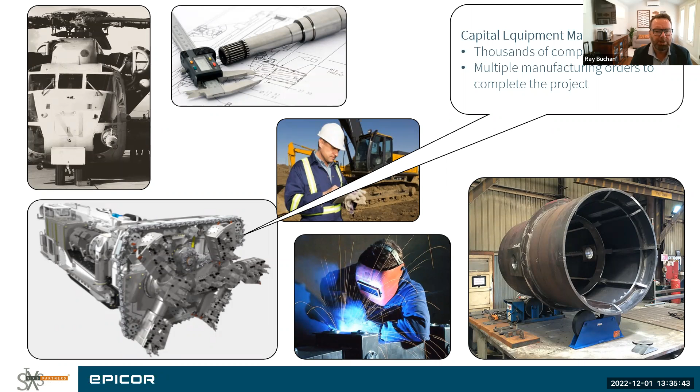So who uses Epicor in a project-based custom make-to-order environment? Hopefully you fall into one of these types of categories, but people that build capital equipment, so there might be thousands of components to track. There'll be multiple manufacturing jobs or orders to complete that project.

People in aerospace and defense are high users of the project module. They need the overall visibility into a project. They need project costing, tracking R&D or SR&ED claims, integration to Microsoft Project. They would have multiple quotes, sales orders, POs that are all associated to this overall project.

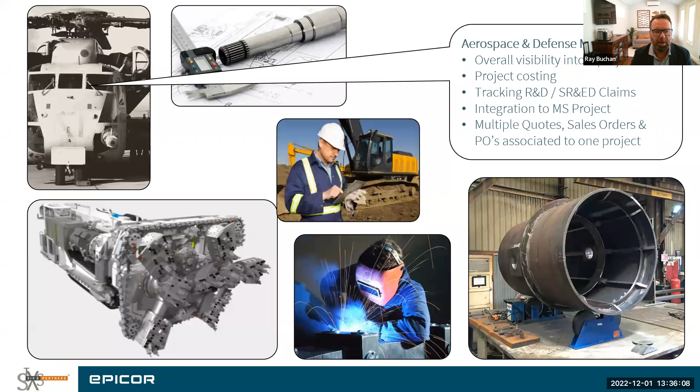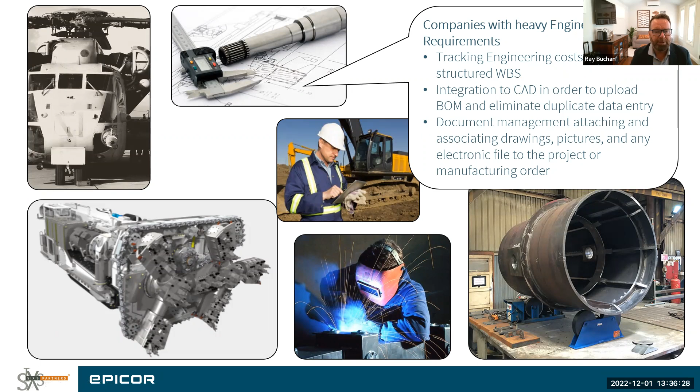Companies with heavy engineering requirements, tracking engineering costs against a structured work breakdown structure, integration to CAD in order to upload bills of materials and eliminate duplicate data entry, document management, attaching and associating drawings, pictures, or really any electronic file to the project to help manage that.

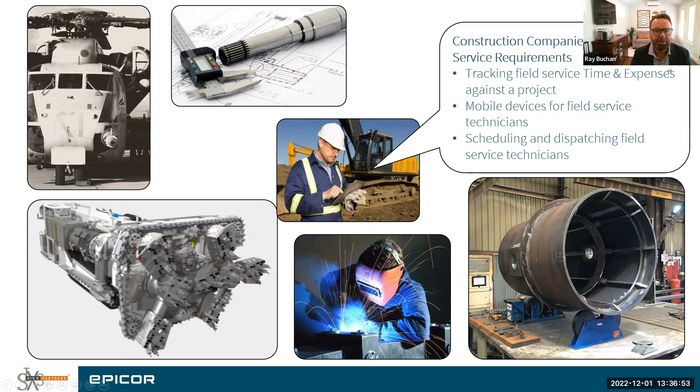People that have service requirements, such as construction companies or people that will build capital equipment and maybe go on site and install it or commission it. They need to track their field service technicians' time and expenses against the project. They want them to have mobile devices to enter those while they're out in the field. And then, of course, somebody to schedule and dispatch those technicians.

And then finally, companies that are made to order or configured to order, where they would be looking at detailed takeoffs for estimating. They build something once, they'll never build it again - it's a pure custom or make-to-order job. And also configure-to-order customers, so where it's a similar product configured for the customer with some options and features.

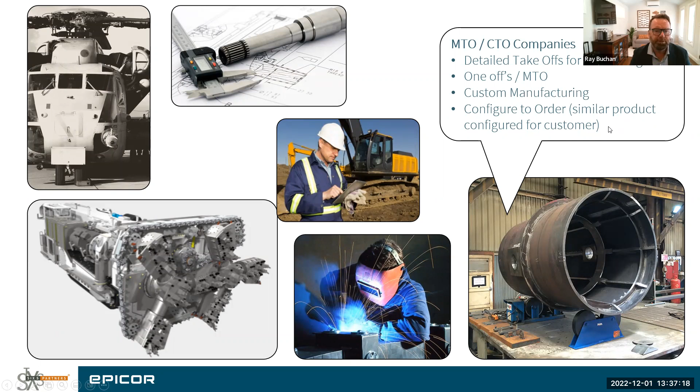So moving along here, briefly about Epicor as a company. Been in business for 50 years, over 27,000 customers worldwide in 150 countries, about 4,400 employees, and Epicor is a $1 billion company. For the smaller companies that are online here today, don't let that scare you. We've got companies that are startups pre-revenue, to companies that are 2 and 3 users, all the way up to companies that are themselves $1 billion companies that may be 600 or 700 users.

And Success Partners - so we are the local implementation partner. We have about 60 staff across Canada and the US. We've been in business for about 16 years, and we are dedicated to Epicor. So we sell, we implement, and we support Epicor Kinetic ERP.

Really, our strength is our people. So our team are people that have worked in industry. They've used the software, they've decided to take a job in consulting. They're certified on the product to the same standards as Epicor direct employees, and they're the ones that are going to help you with best practices and recommendations. So the implementation and training, it's really less about the point and click and learning the software and more about how is this going to work for your business, and we'll help you with that.

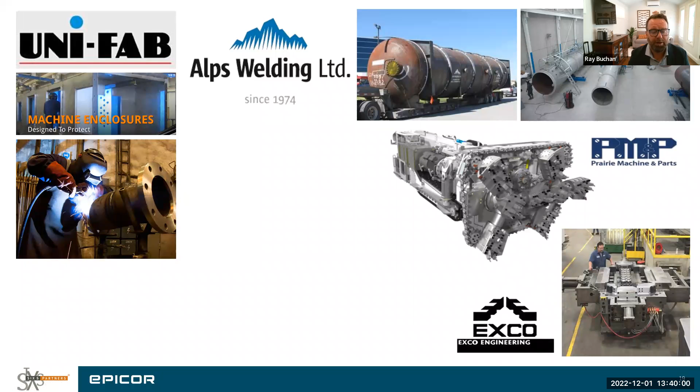Exco Engineering is a heavy tool and die company, also project-based and a big user of the CAD integration software. Prairie Machine, based out in Saskatoon, Saskatchewan, manufactures capital equipment, including mines for mining equipment for the potash mines. Lots of aerospace and defense customers too, like Cascade out in BC. Again, lots of metal fabricators.

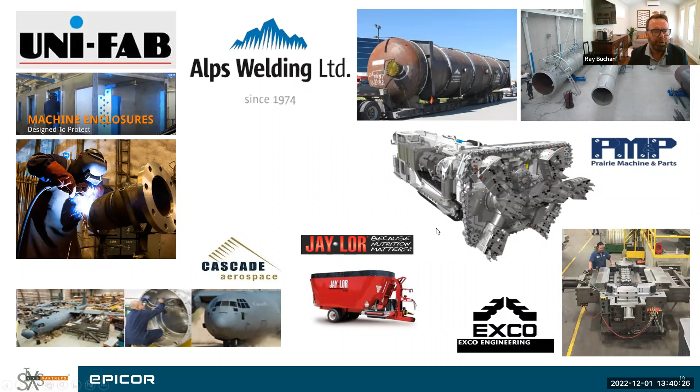Jaylor is a heavy configure-to-order company where they'll actually take an order from a customer on the phone, ask them questions about what they're looking for, what options and features they want, and it will not only create the sales order but actually release the manufacturing job to the shop floor automatically.

Lots of automation companies out there as well, again more project-based, engineer-to-order.

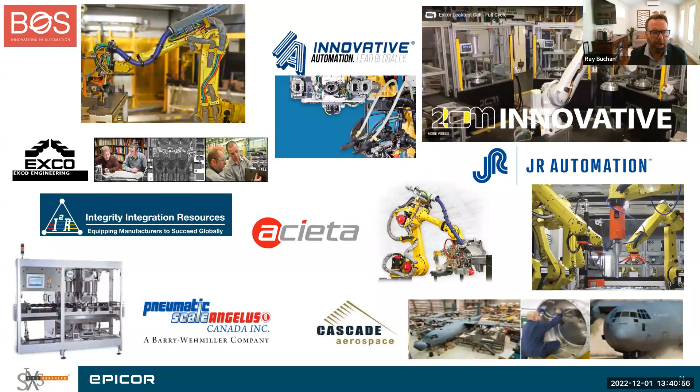This customer here is one that I visited a number of years ago, and some of you may have seen this already. This company is a great user of dashboards in Epicor, and you're going to see those today in the software. So what's a dashboard? It's a way of querying the information in Epicor and extracting it and showing it in a view that's helpful for you to run your business.

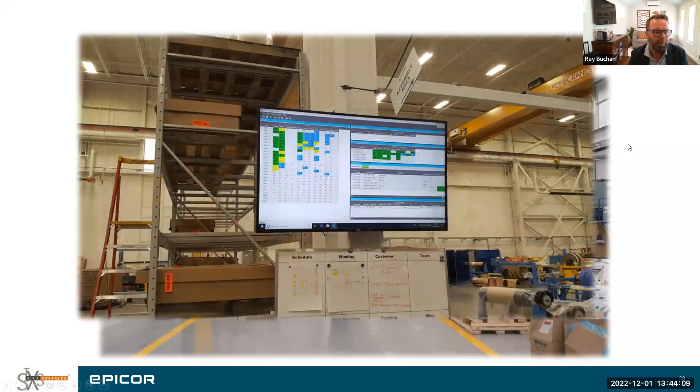They're also great users of dashboards. Here's a dashboard they built where on the left-hand side they see the jobs, with color codes changing based on rules they've set up. When an operator or employee clicks on a job, it shows additional information on the right-hand side. You can design these dashboards any way you like to help somebody in their daily role, or help somebody on the shop floor or a department.

I'm not saying we will never use a third-party product, but Epicor has a lot of functionality in the core solution. Things like project management, warehouse barcoding, shop floor data collection stations, finite scheduling, product configurator - I could go on and on. These things, in my experience with other ERPs, are a lot of times third-party bolt-ons. And of course the vendors won't highlight that, but in fact they are. So with Epicor, you'll find a lot of this is built right into the core solution.

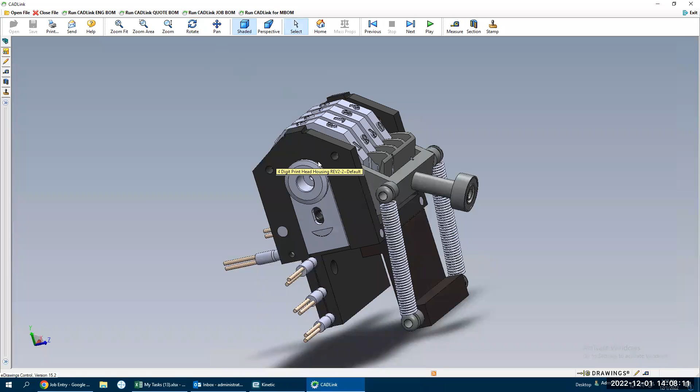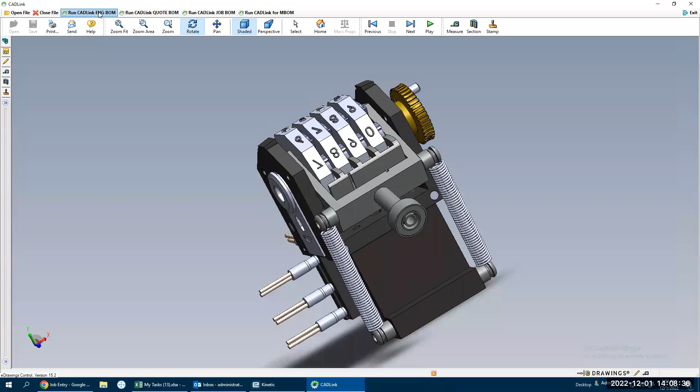So here I've got a 3D model in SolidWorks, and the CAD solution really doesn't matter. You'll notice the plugin allows me to upload that bill of material. When I run the CADLink, it's going to look at that 3D model, look at all the sub-assemblies, look at all the components, and then compare it to Epicor. It asks, what do we have in SolidWorks, what do we have in Epicor, and let's compare it. A challenge for a lot of companies is engineering calls something one way and production calls the same thing something different. So we're going to cycle through those sub-assemblies and components, and it's going to return a view that gives us that analysis.

That's the CAD integration piece, and the real benefit here is for companies doing multiple revisions and partial releases, with thousands of components. This really is a must-have for keeping both systems in sync. If you've got a fairly simple bill of material, you can just upload that through Epicor, or you would build it right within Epicor itself.

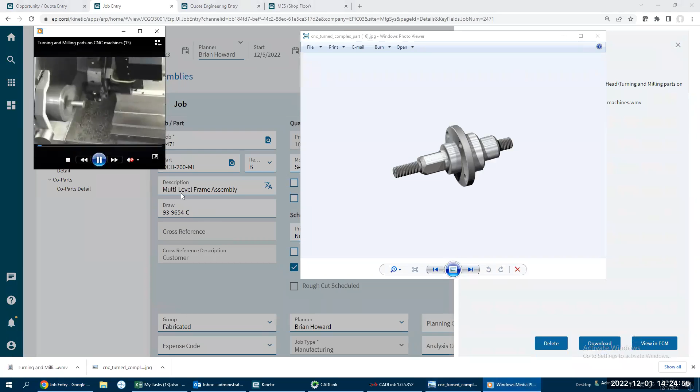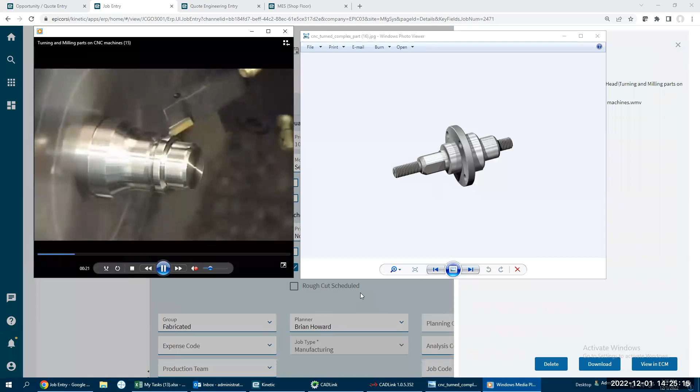What I do want to show you is looking at document attachments. Let's refresh that, and I'm going to look at the little paper clip here. Whenever you see that, this is a common feature throughout the system—Epicor allows you to attach and associate any document to any application. In this case, we've got drawings and videos and additional things attached to a manufacturing job. I'm going to download these and have a look at them. What you'll see is these two files are attached to this manufacturing job. They can be attached to the operation, to an inspection plan—really any file you want can be attached and associated not only to a manufacturing job, but anywhere throughout the system. And of course, these are all visible on the shop floor devices.